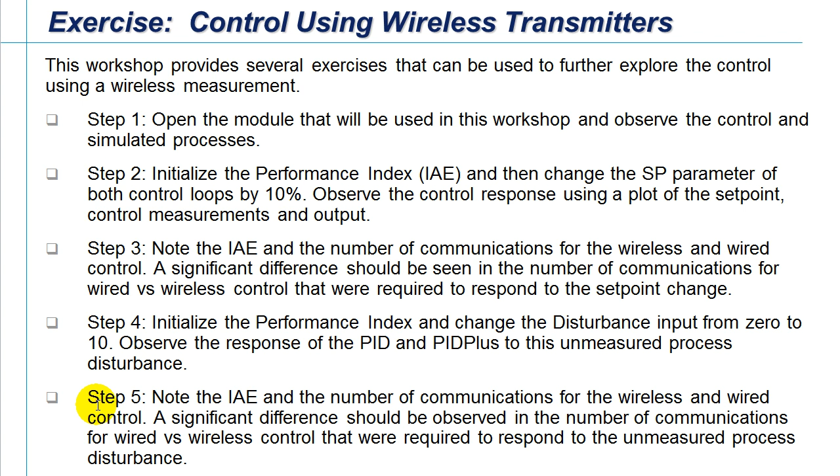a set point change. We will then examine the integral of absolute error and number of communications for the set point change. After doing this, we will reinitialize the performance index and introduce a disturbance change, and then again examine the integral of absolute error and number of communications for wired as well as for wireless control.

In the module, we'll be simulating two heaters. In one heater, we'll have a conventional wired temperature measurement. We'll be controlling with PID and adjusting a wired throttling valve. And the other heater simulation will be using a wireless temperature transmitter and PID Plus for the control, which will be adjusting a wired valve.

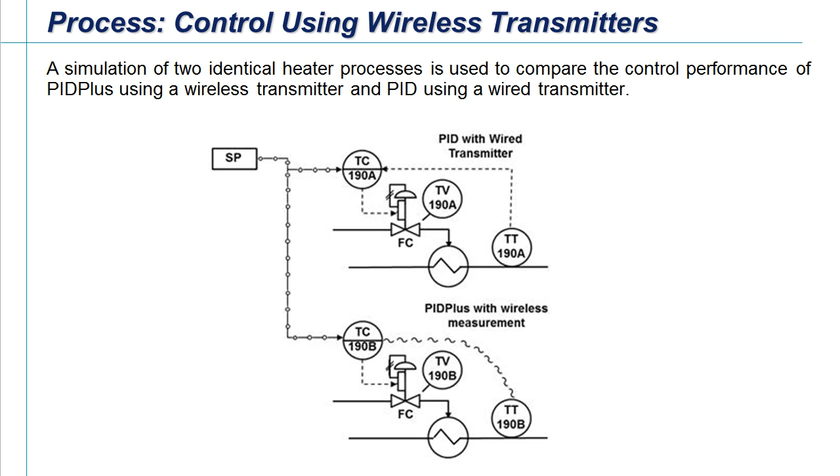The set point for both the conventional control and the wireless control are common, so a change will impact both. Also, the simulation is set up where a disturbance impacts both heaters at exactly the same time, so we can compare performance for set point as well as disturbances.

The module we'll be using is shown here in the upper part. We'll be simulating wireless communication of the temperature measurement. PID Plus will be used, and then that will be adjusting the output. We'll be comparing it to conventional input, PID, and output. To allow performance to be compared, we'll be simulating two heaters. These simulations are identical, each having the same gain and dead time and time constant.

In the wireless communication, we'll be using windowed communication with a deadband of 1%, a periodic update of 8 seconds, and a default time of 16. The PID that we'll be using for the wireless control has the option for PID Plus enabled, and so we'll be using PID Plus for the wireless control.

The tuning of that PID Plus has a gain of 1 and a reset of 8 seconds. The tuning that we'll be using in the PID for the wired input is exactly the same. That is, it has a gain of 1 and a reset of 8. When we're using PID Plus, we tune it exactly as though we had a wired installation. We don't have to be concerned about update or communication.

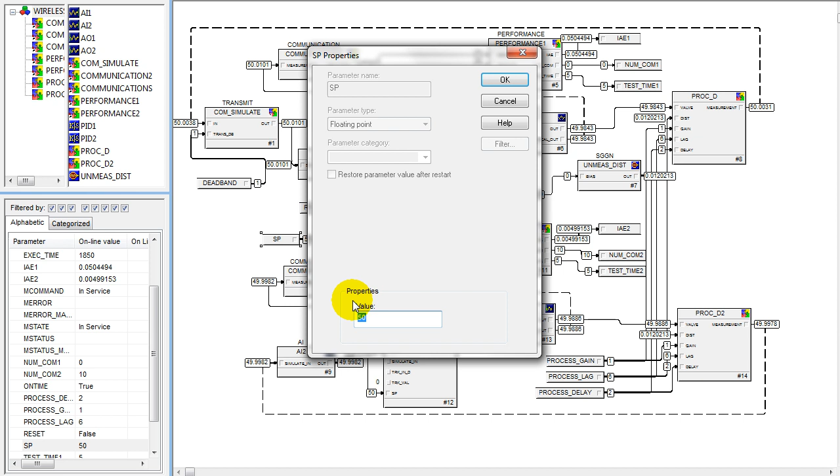To demonstrate wireless control, we'll change the set point by 10%, so the set point change has an immediate impact on both the wired and wireless control, and that's being reflected in the simulation of our process. We can better visualize what's going on by looking at a trend.

In this trend, we see the set point change in green. The smooth change in the measurement value is being provided by the wired transmitter. The stepwise change is the measurement that is being communicated wirelessly to our PID Plus.

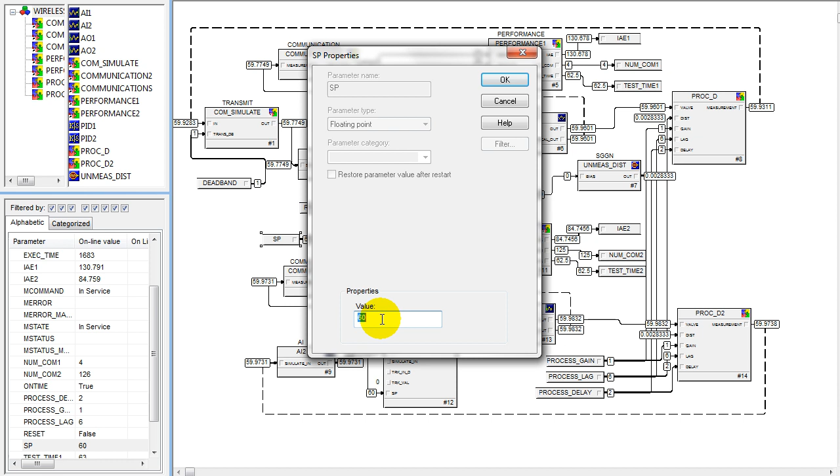Notice the output: the smooth change is again provided by the PID. The stepwise change is due to the PID Plus. It only updates its output when we have a set point change or a new measurement. On a set point change down, we'll examine that by changing it down.

And again, we'll look at our trend, examine the behavior. We notice that for the initial set point change that we came to exactly the same valve position and value for both the wired and wireless. Again, on the set point change down, we notice that we see a smooth change due to the wired input and PID, and the stepwise change is due to the PID plus.

Initially there was some difference, but after a bit of time we notice that the behavior is exactly the same, where we come to steady state at the value of our set point with no oscillation or no variation in our control parameter.

Let's examine now the behavior for a disturbance change. We'll reset our performance index back to 0, and we'll introduce a disturbance change of 10% and examine its behavior. The disturbance immediately impacts our process, and as the process starts to respond to that disturbance, the control starts to take action. We don't take immediate action with the wireless because the wireless measurement is only updated every 8 seconds. So no action is taken until we get a new measurement.

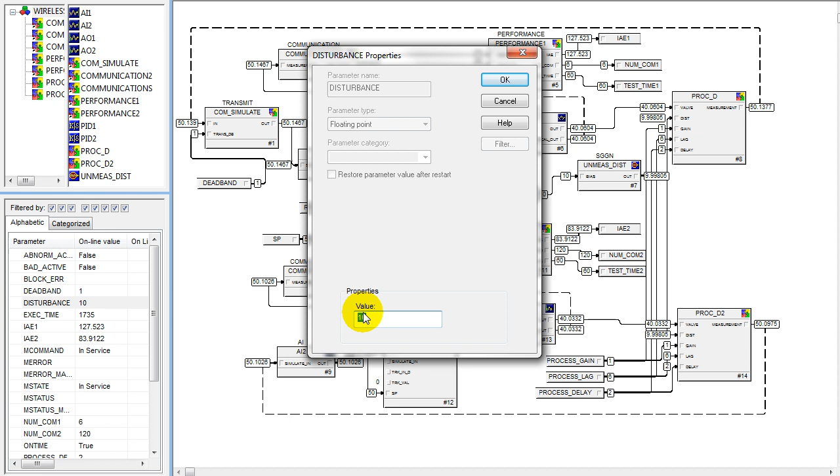We'll change our disturbance back down and examine the behavior for a change in the opposite direction. When we do that, we notice that again we see the change in the process parameter due to the disturbance, and then the control is responsible for correcting for that. We notice again that there is some delay in terms of the wireless control responding, just due to the fact that the communication is only every 8 seconds normally for the wireless communication.

But after a very short period of time, we notice the valve settles out at exactly the same value as the wired PID, and also we come to exactly the set point. So we don't suffer much in terms of control performance by using a wireless measurement with PID plus.

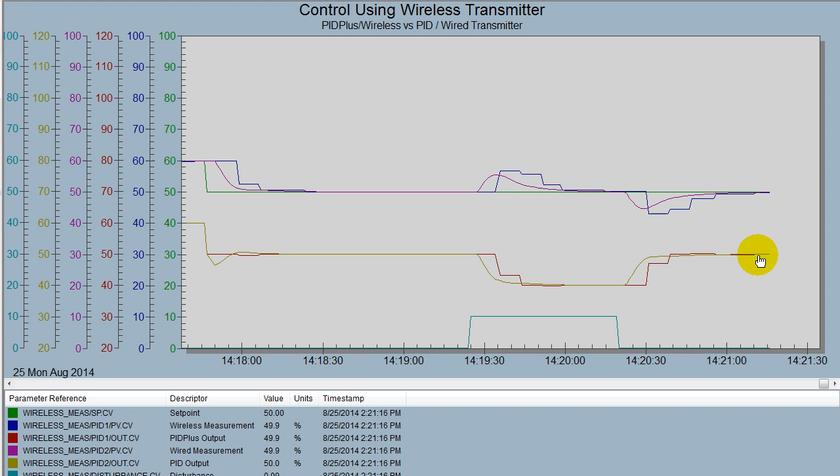If we then examine the performance indices, we notice again that there is some difference between the integral of absolute error for wired versus wireless. However, for the wireless we only used 12 communicated values versus for the wired 270 values were used over that same time frame. So this demonstrates the power of PID plus and the ability to use very few communications and do control that's very comparable to wired PID.